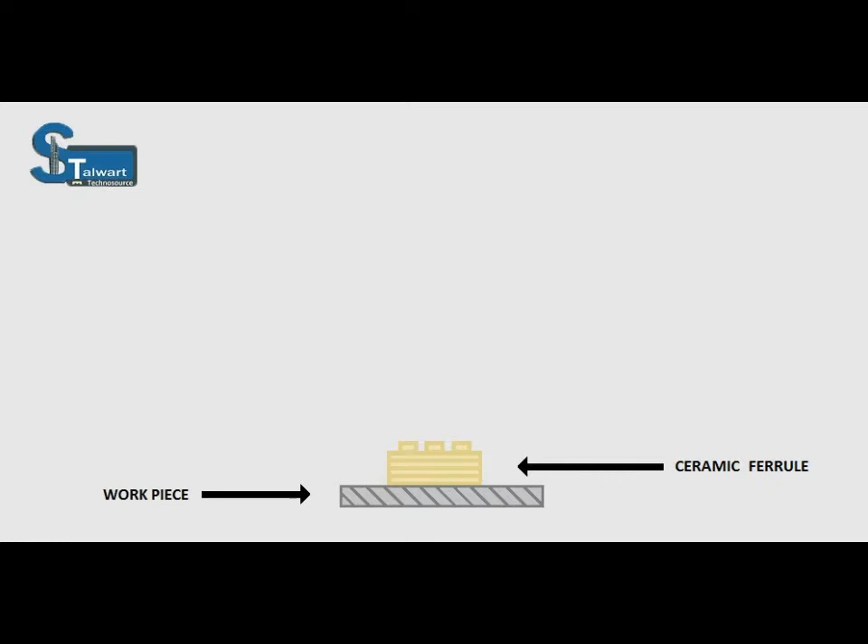The drawn arc stud welding is carried on a base material called the workpiece, on which welding is performed. A ceramic ferrule is placed on the workpiece, which allows escape of sparks during the process. The stud used consists of a melting flux located at the base of the stud.

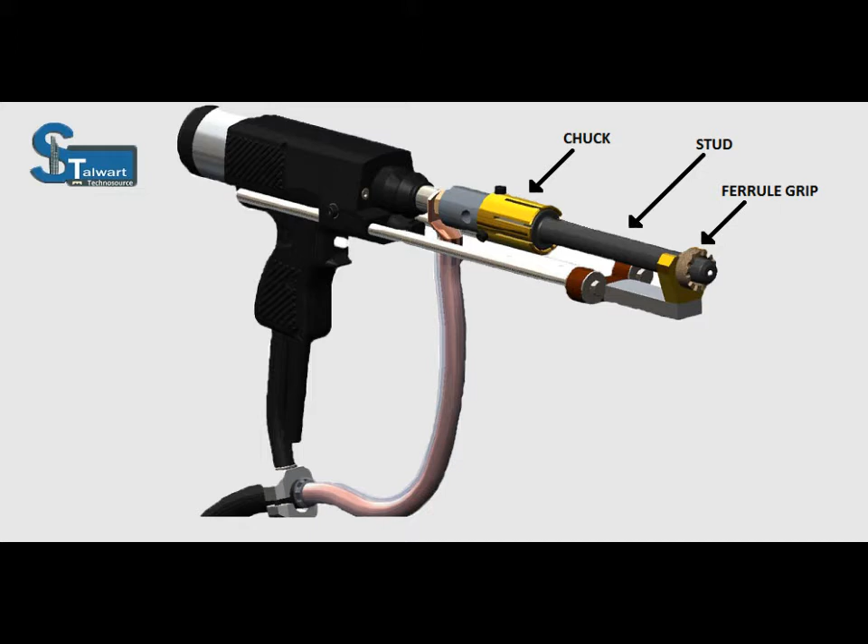The stud welding process begins by loading the stud in the gun. The gun has a chuck that holds the stud, and the ceramic ferrule is held on a ferrule grip mounted on the footpiece of the gun. The gun is positioned against the workpiece.

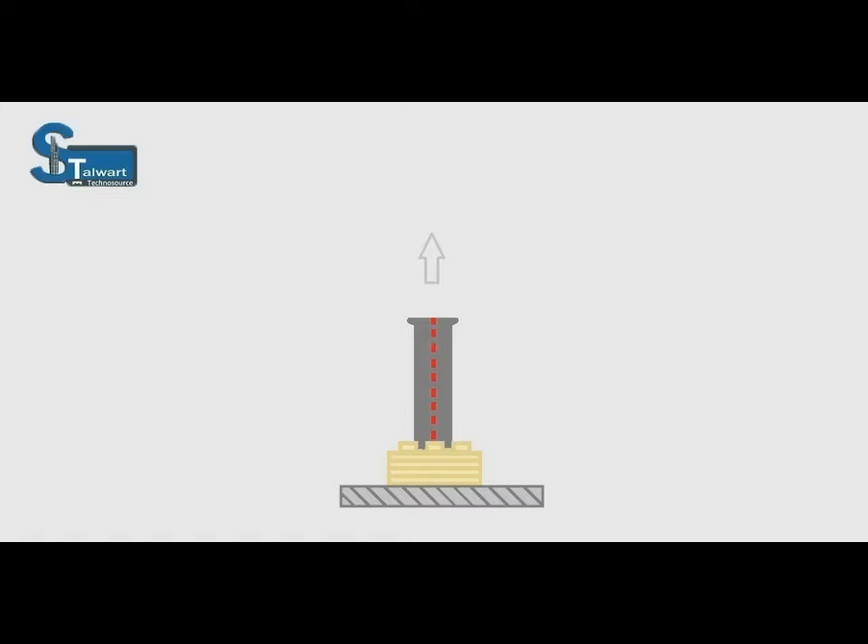The gun is triggered, and current passes through the stud to the workpiece. The stud is lifted from the workpiece for a prescribed length by the solenoid in the gun, and held for a prescribed length of time. At the end of the weld cycle, the stud is released and plunges into the molten pool of the workpiece, contained by the ceramic ferrule.

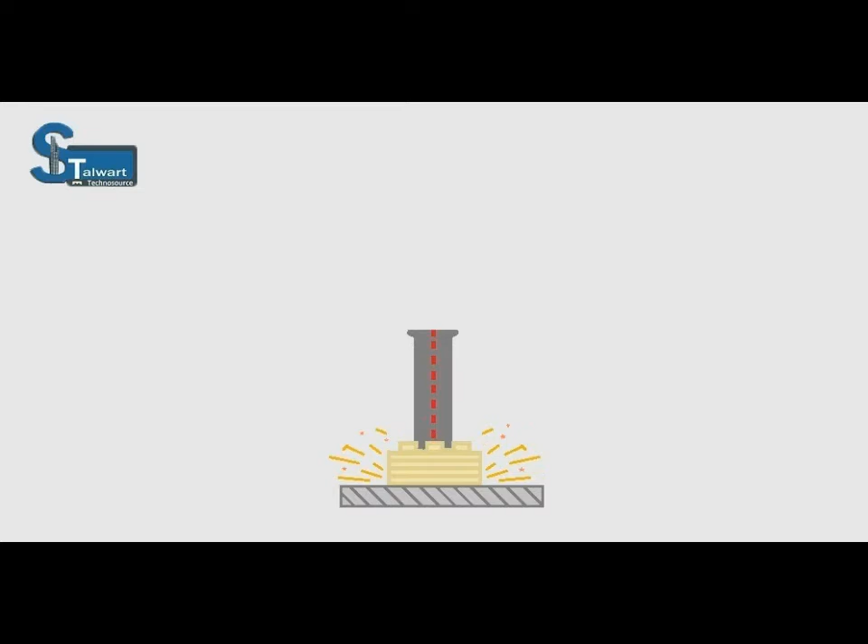The gun is lifted off from the welded stud. The weld that results is that the length of the stud is reduced.

Now let's have a closer look at the process. This is the cross-sectional view, where the base of the stud is melted along with the workpiece. As the weld cycle is completed, the ferrule is discarded.

Drawn arc stud welding with shielding gas. This process is usually used for studs where shielding gas should be used to avoid pore formation.

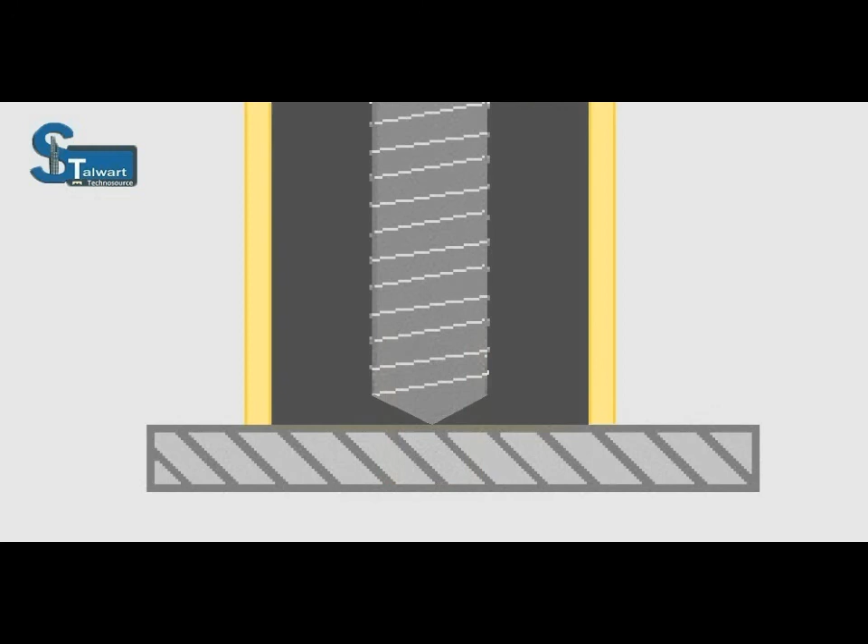The gun is positioned against the workpiece. The gun is triggered, and current passes through the stud to the workpiece. The base part of the stud is melted using current in the gas through the machine. This is the resultant weld.

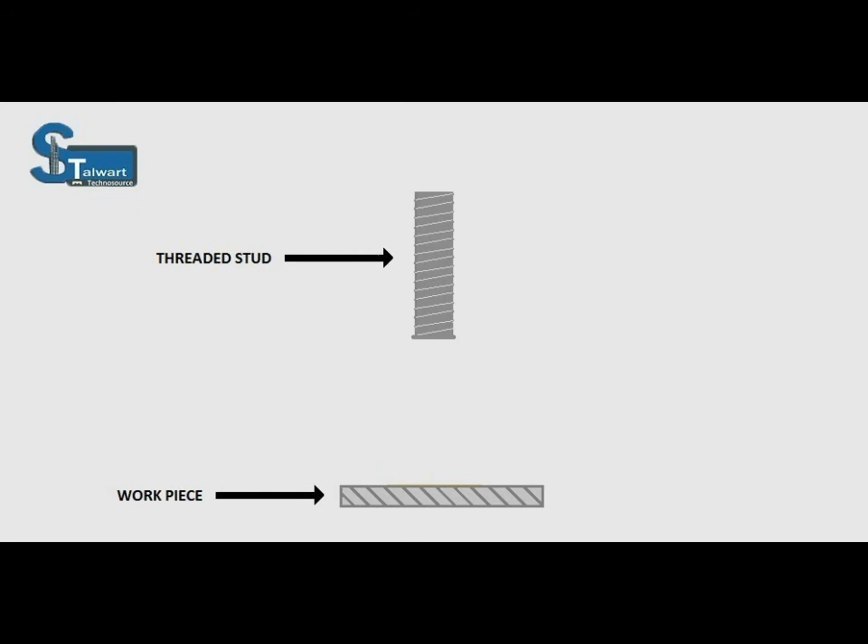Short-cycle stud welding. The short-cycle stud welding is done with or without shielding gas. This process is usually for studs with small diameters, which don't contain flux at the base part.

The gun is positioned against the workpiece. The gun is triggered, and current passes through the stud to the workpiece. This is the resultant weld.